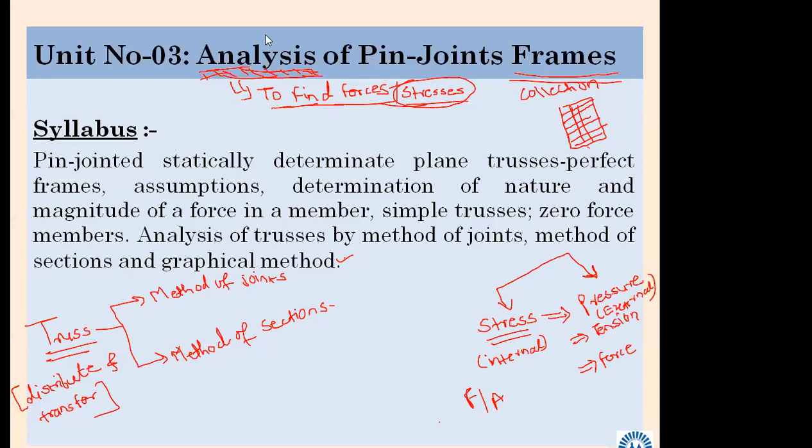I will wait 2 minutes until students join. Otherwise we will take a revision of what we covered yesterday, when we started chapter number 3.

I think upcoming unit test number 2 will be there. You might have got the timetable for unit test number 2. Whatever syllabus is covered till tomorrow or day after tomorrow, you have to prepare that.

It is just a multiple choice question test, unit test number 2. I tried to put some problems as well, so you can solve those problems and proceed.

Yesterday we just started unit number 3, analysis of pin joint frames. Hereafter, as I discussed already, chapters have less content compared to the first 2 chapters. You should not think sir is going fast now, it is not the case. Chapter number 1 and 2 are the largest chapters in the syllabus.

In chapter 1, again, chapter 1 was the largest one. We studied a lot of things and solved a lot of problems. In this chapter also, there are only 2 methods to analyze the pin joint frame.

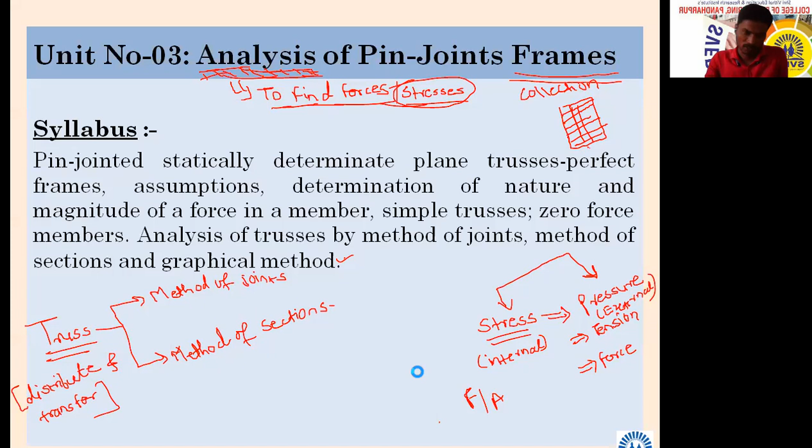Are you with me? Yes sir. What is the meaning of analysis or analyze the truss? It means finding the forces in each member, because a group of members is nothing but a truss. Very simple. Then we saw the introduction: a pin joint frame structure made up of slender, which is a lengthy element. That we discussed yesterday.

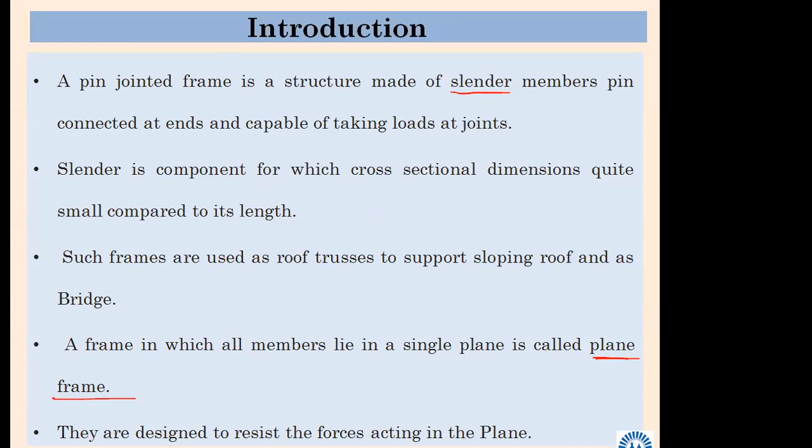Then we saw there are 2 types of frames. Which are they? Plane frame and space frame. Plane frame: a frame in which all members lie in a single plane is called a plane frame.

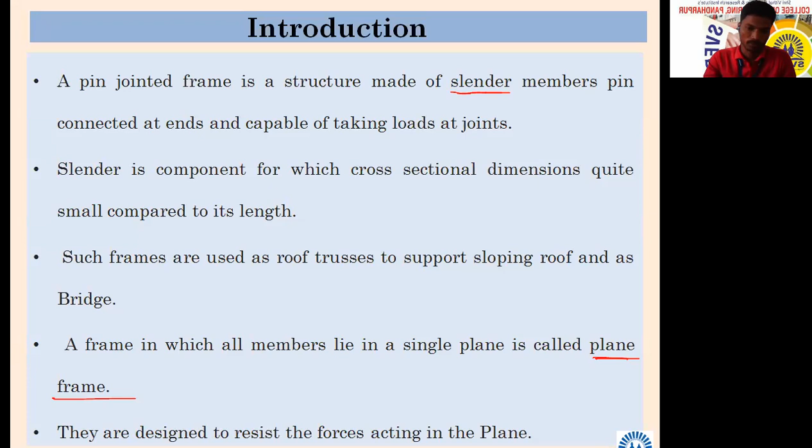A frame in which all members lie in a single plane is called a plane frame. What is the other one? Space frame. What is space frame? If all the members of the frame do not lie in a single plane, then it is called a space frame.

Examples? What have we seen yesterday? Tripod, maybe a fabrication shop, something like that. Electrical transmission towers. Why is it used? Different members are used to distribute and transfer the force. If a single member is used, the load will be more and it won't be able to sustain that load, so failure may occur.

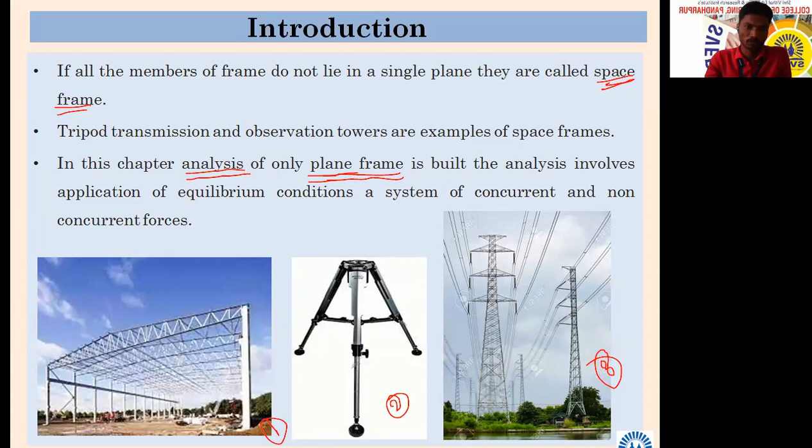Then we have seen types of frames. I will not read the total essay, but there are three types of frame or truss. Which are they? Perfect, deficient, and redundant.

The formula is M equals 2J minus 3, where M stands for member and J stands for joint. If this equation is satisfied, we call it a perfect truss - meaning whatever number of members are available, these are sufficient to transfer the force.

Deficient: if M is less than 2J minus 3, meaning the number of members in the truss is less than 2J minus 3, then we call it deficient. Failure may occur because the number of members used in the truss are not sufficient to transfer the force. That's why it is called deficient.

And what is redundant? Redundant means when the number of members are extra, or more than requirement. In other words, if the number of members used in the truss or frame is more than the requirement, then it is called a redundant structure.

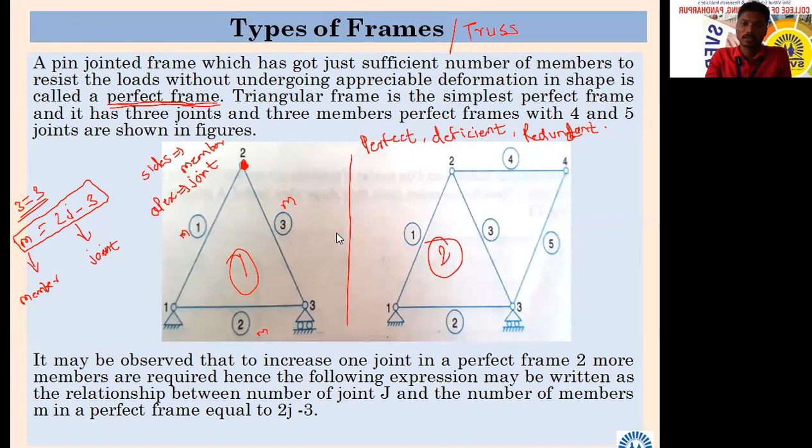There is one last point related to redundant structure. Can someone tell me? A redundant structure is statically indeterminate, because we can't find the forces in a redundant truss - we can't find the forces because the number of members used in the redundant truss are more than requirement. Unnecessarily, the number of members are increased in the truss. That's why it is called redundant.

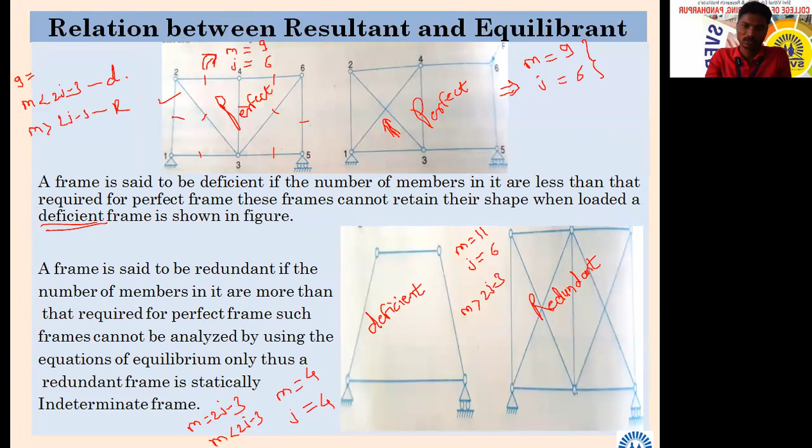So that we have seen. After that, assumptions - whenever we solve problems related to truss, certain assumptions we have to go for. Which are they? Number one, the ends of the members are pin jointed. Already the name of the chapter itself is analysis of pin jointed frames or truss, so whatever members are there, the ends of members are pin connected or hinged.

Then the loads are only at the joint. You should remember, in this the load will be given only at the joint - it will not be given in between the joints. If you find such a truss, you will not find the load given in between; always it will be given at the joint.

Once we are going to analyze the truss, meaning once we find the forces in the truss, we are going to neglect the self weight of the member. Then members have either uniform cross section throughout, or if they have varying cross section, the centroid is located along the same longitudinal line.

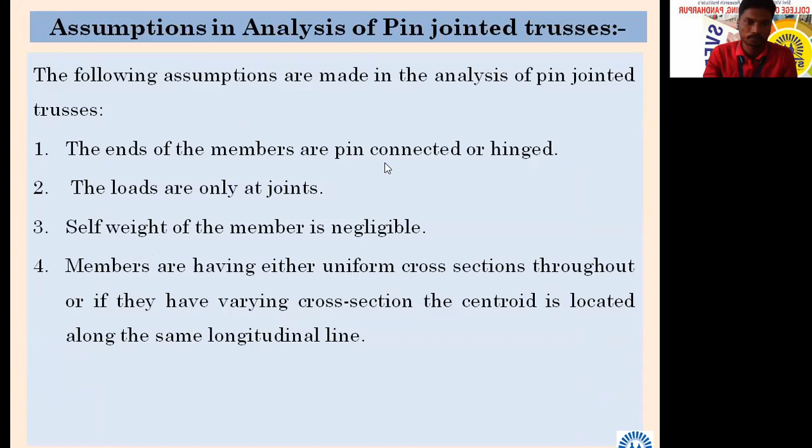Are you with me? So these are the simple assumptions - four assumptions while solving or analyzing the truss. Further, the nature of force - this one is most important.

The members of pin jointed frames are subjected to either tensile or compressive force. Can someone tell me? Already I have written this also. When we say a particular member, you should know the difference between a member and a joint first - what is the difference between member and joint, you should know that, then you can proceed.

Can someone describe when we say a particular member is subjected to tensile force and subjected to compressive force? Can someone tell me?

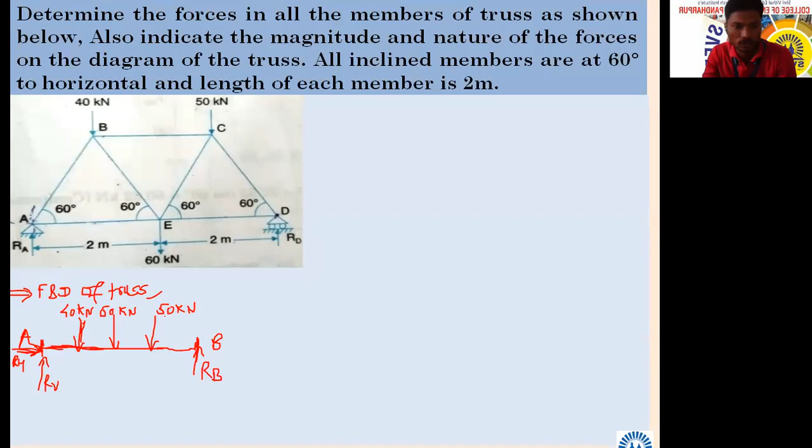And here there will be one RB vertical. Then force, we can say something like it is coming like this, RB. Here also there is one force, and here also there is one force. Which are they? 50, 60, and 40. So likewise, you have to show the forces first.

First step is to find reaction. Are you with me? Is it possible to find reaction here? Yes sir. If you apply, suppose summation, 3 equations we know.

So here R, so here R, B, not B, A - RAV vertical, and here RAH.

So if I will apply summation Fx is equal to 0, what will happen? Is there any force horizontal apart from RAH? No sir. So it will become 0 directly. There is no question, no force is horizontal.

Okay, suppose now RB. Suppose I will apply now summation Fy is equal to 0. What will happen? This 40 plus it will be minus... sorry, so let us apply summation Fy is equal to 0.

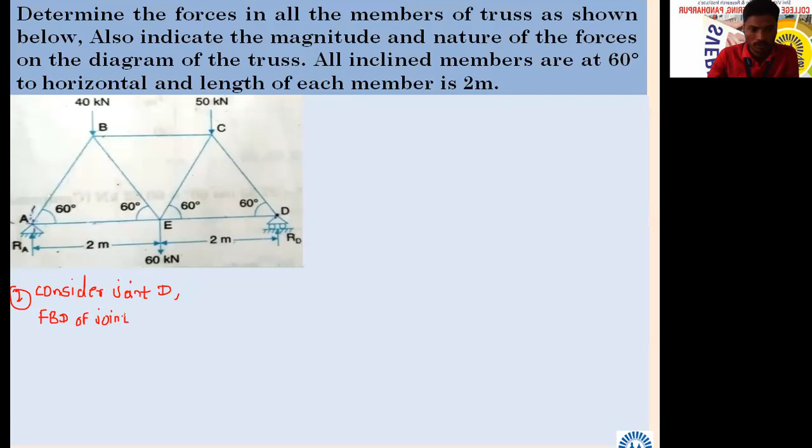I will go here and you have to tell these values in the further problem. Consider second now, consider joint D. Okay, and here I will write the FBD of joint D. So what will be that?

There is point D in which there is a reaction called RD. Then here there is one more reaction, a horizontal reaction. This force here will be force CD, and this force will be ED.

Okay, now tell me the nature. Only three forces are there, so how will we assume this? Compressive, okay, compressive. So is it possible to apply here? RD is known to us, right?

What is the value of RD? Can someone tell from the back? 77.5. Okay, and what is this angle? 60 degrees.

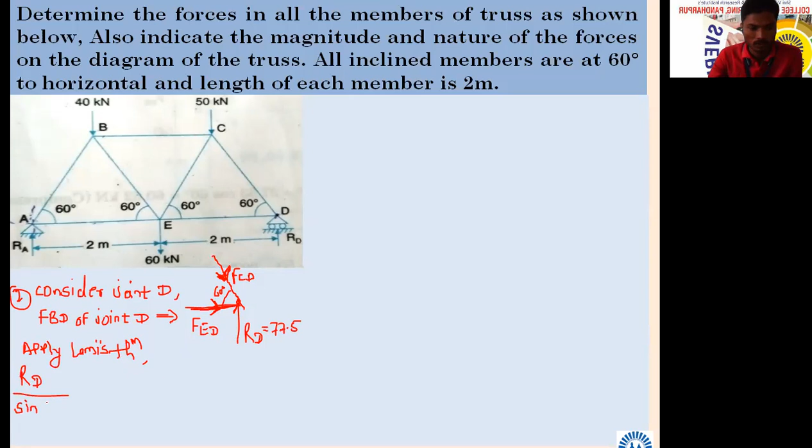What will that be? RD divided by sine of the angle between the other two, which is 60, sine 60. Then ED, FED divided by the angle between the other two, 150, sine 150. Next, FCD divided by the angle between the other two, sine 90.

Which gives force in ED. Now you have to calculate force in ED equal to, and force in CD equal to. Calculate. Just check, one thing we have missed here, I will tell you what that is. First calculate this, just check how much it is coming.

FED is 44.74 kilonewton. So the answer did not come negative. And how did we assume force FED? Let's assume compressive. So in bracket you have to write C.

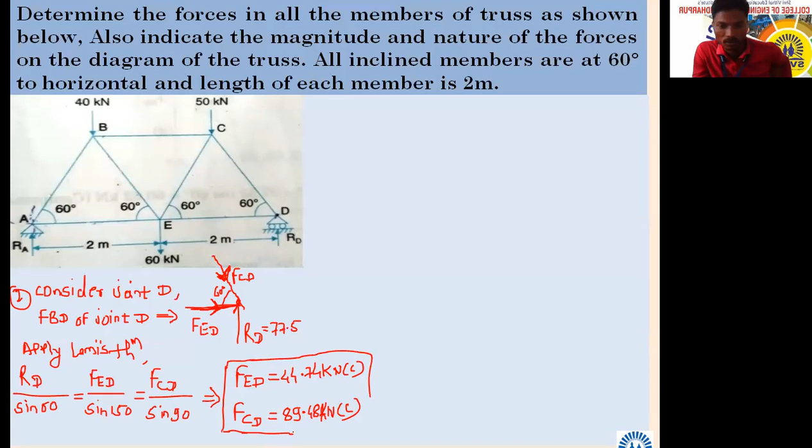How have we assumed this force? Compressive, compressive. So that also we have to mention. So these two we have calculated here. So out of 7, how many forces have we found out till now? Here the nature is missed. You should not miss this nature because it is specifically asked. Also indicate the magnitude and nature of force.

So how have we assumed FAE? Tensile, so I should write T in bracket. Likewise FAB is also tensile, so I should write T in bracket, and C in bracket for the compressive ones. So out of 7, how many have I found? 4. Okay, now next.

Let us see, now let us consider joint C. Shall we consider joint C? Choice is yours, either you can go for E, B, or C. You have to apply logic finally. Suppose we will take point E.

Any point you can take. Shall I take point E? I can take E, B, C. So I will take point E. Let us see what will happen.

Consider point E. Okay, FBD. I will draw the FBD here. FBD of E. Okay, what will be that? So here there is a force. How much is it? 60 kilonewton.

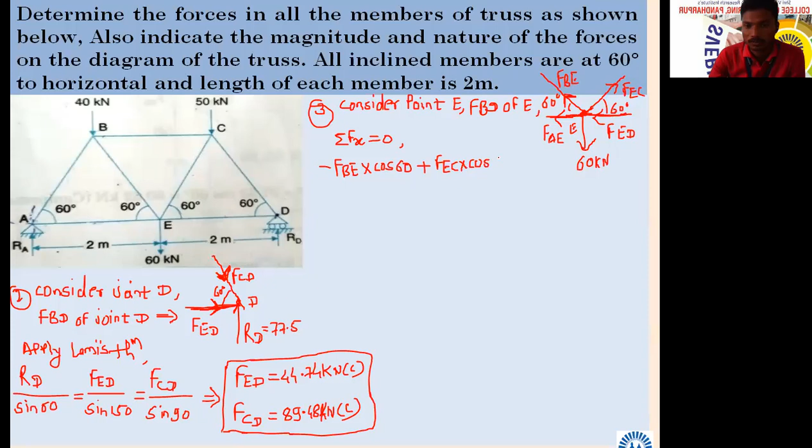FEC into cos 60. Okay, minus - what is the value of FAE? 41.85, 41.85, 86 or 85, whatever. Minus FED, we have calculated as 44.74. Here it is - will this 60 kilonewton force come in here?

No sir, it will not come. Now tell me the value of cos 60. Tell me the value of cos 60. 0.5, sir. 0.5, yes sir.

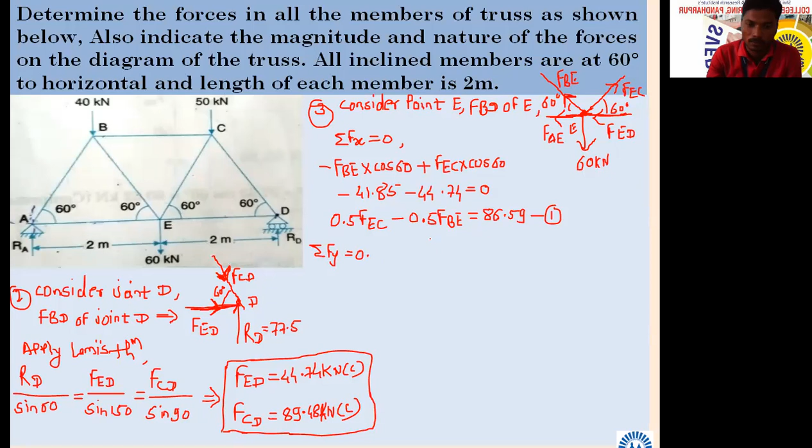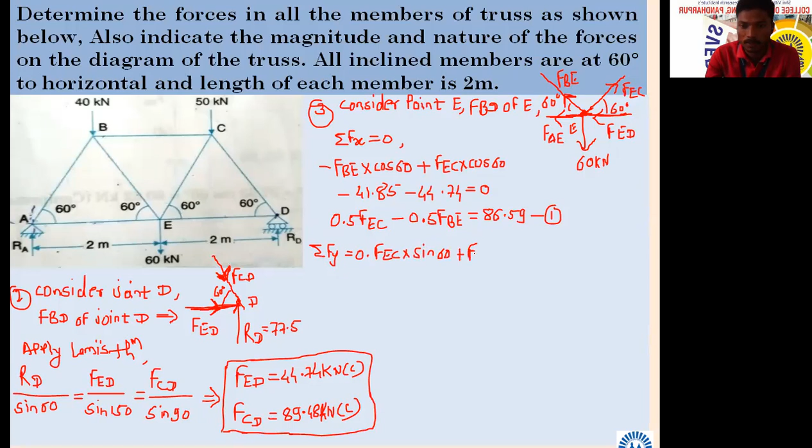86.59. Equation number 1. Now summation Fy, summation Fy equal to 0. First now, the Y component - both will come positive. Correct? Both will come positive. FEC into sin 60, plus FBE into sin 60.

FBE into sin 60. Then horizontal forces will not come. This minus 60 equal to 0. Tell me the value of sin 60. 0.8, 0.866. 0.86, yes sir.

FEC plus 0.86 FBE equal to 60. Equation number 2. Follow equation number 1 and 2, you will get the values of FBE equal to how much, and FEC equal to how much.

Solve it and tell me who has the answer. Simultaneous equation, take help of a calculator. So I hope you are aware about how to solve simultaneous equations on a calculator. Tell me fast.